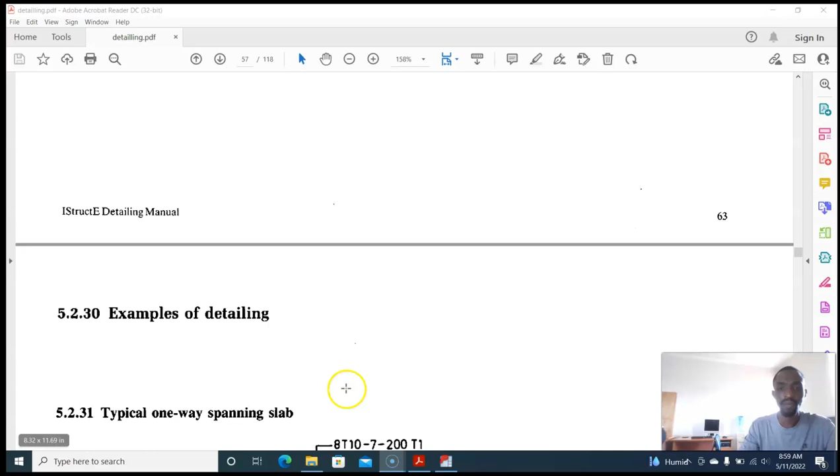So we had left off at this place. We had left off at this place. You click there. Yeah. Schedule. Yes. Schedule. Yes, we are going to check that. So we're going to check. Okay. So now we are at this place.

We had already done all bottom rebars. This is a bottom one going all the way. This is a bottom one going all the way. This is a bottom two going all the way. This is a bottom two going all the way.

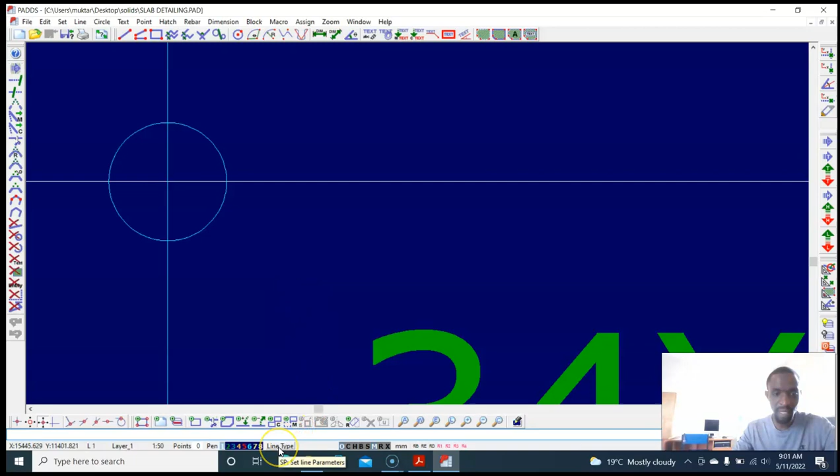Yes, this is the dimension line. This is the rebar. The rebar is supposed to be thicker; this line is supposed to be lighter. We have not activated the line thicknesses display, but you can do that here. View line width. So you see the blue is thicker. So when you print, this is going to come out thicker. This is going to come out thinner.

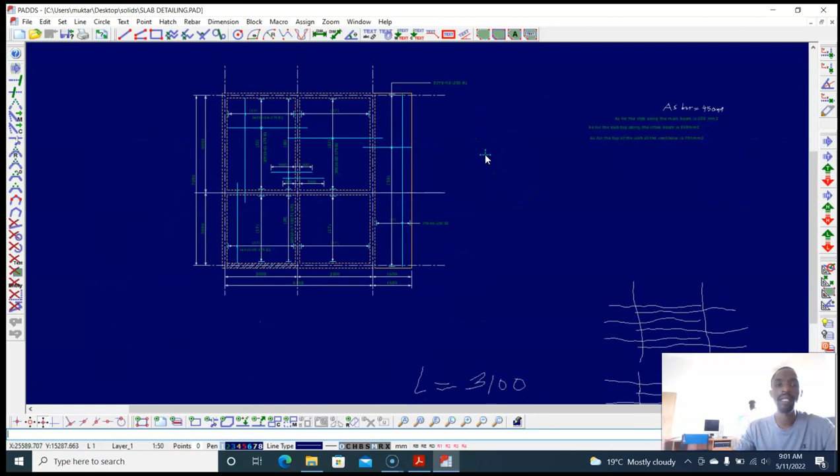Okay. So we can return. We've just done the bottoms, the bottom rebars. So now we want to do the tops. Even for the cantilever, we have done the bottom two. We have done this bottom one. Okay. So let's now start on the tops. So we want to put a top at this place. So this is a bottom rebar. It ends here. We need a top at this place.

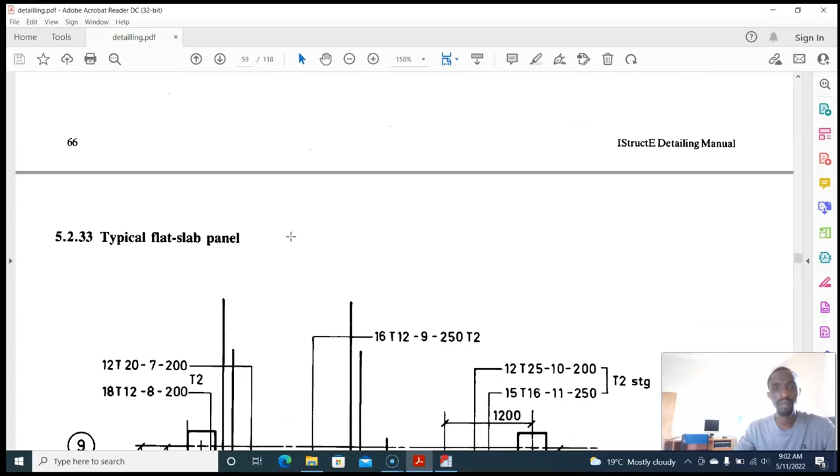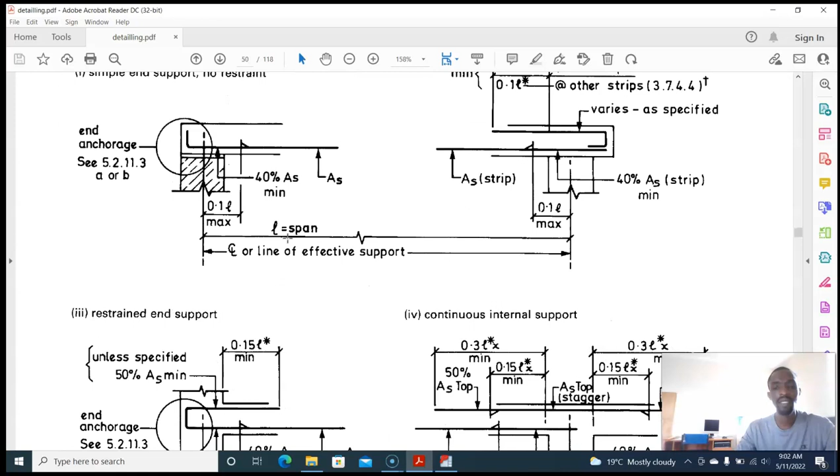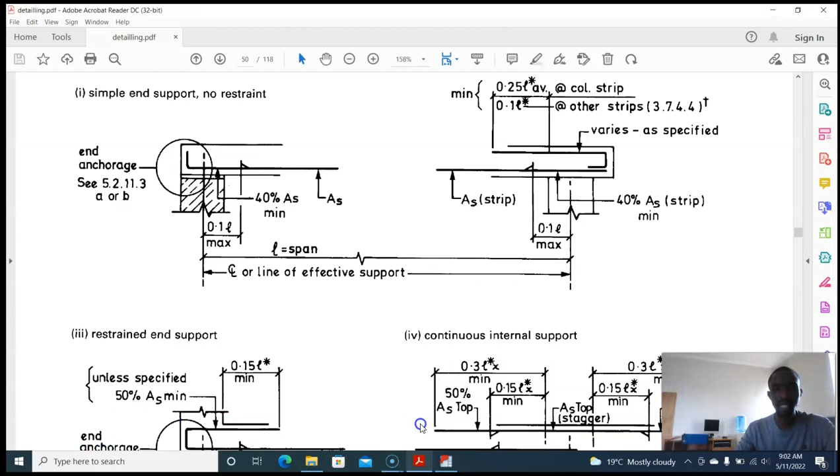So if we go back to this place and look at, which page was that? Okay. So let's see. That's the place. So at that end, what kind of an end is this? Because the beam is here, and the rebar will come into the beam. It's a restrained end. So that being a restrained end, we are talking about restrained end support.

So what we need to be keen about is that this rebar that's coming here is a U-bar, should be at least 40% minimum of this AS. Yeah, 40% of that AS. And should also be at least 50% of the top. The bottom you want 40, and the top you take 50%.

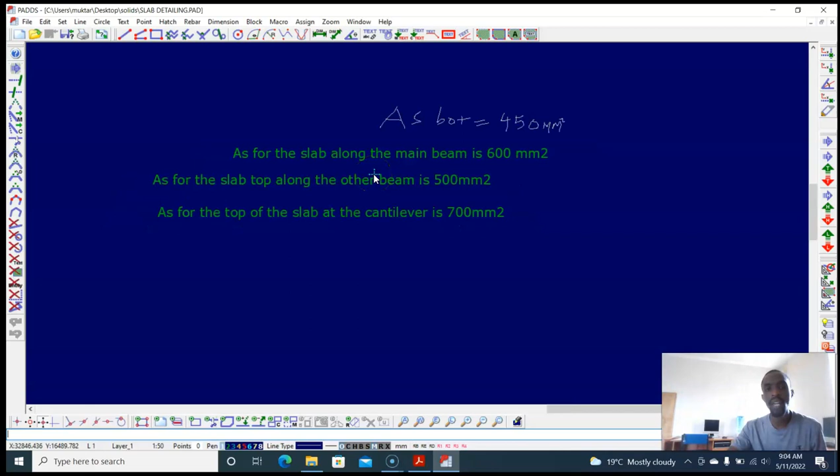So let's check what 50% is. This rebar is 24 by 10 at 175. So it's tens at 175. The requirement for that bottom we assume is going to be 450 millimeter square. So we're going to find 50% of 450. 450 times 0.5 is 225.

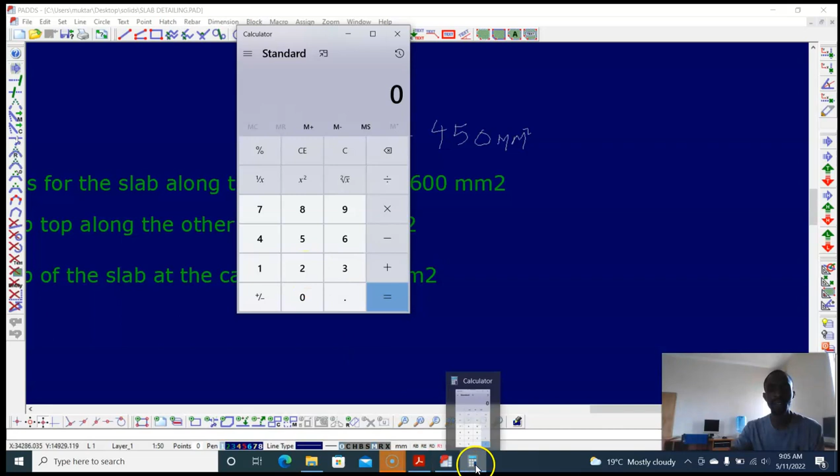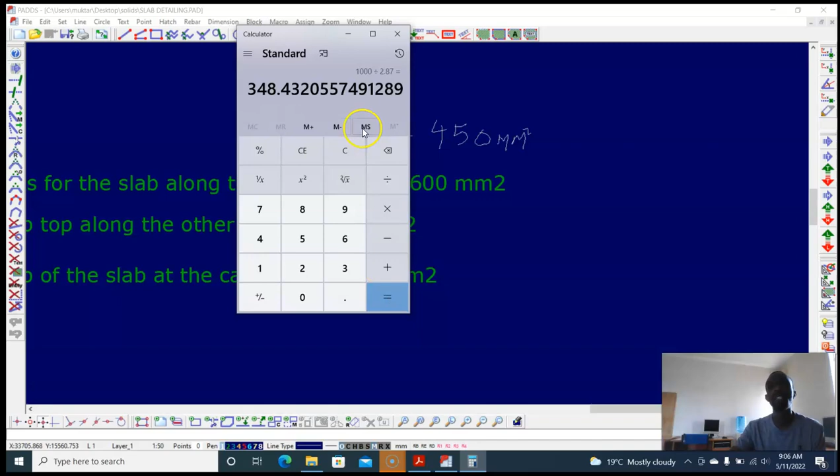So 225, and you're using 10. A 10 is 78.5, the area of one rebar. So 225 divided by one rebar, 78.5, gets you to 2.87 rebars. So 1,000 divided by 2.87 gets you to 348. So that spacing is quite a lot. Let's adopt 250. So we come in here and make that rebar.

This rebar should come 0.15 of L this way, the hook, but not less than 45 diameter. And this lower side, it must overlap. So let's check the overlap, and let's check the 0.15. The overlap is 50 diameter according to the code, not 45. 10 multiply by 50 is 500. So you need 500 minimum overlap this way, and then this rebar goes up and goes that way. This side you need 0.15.

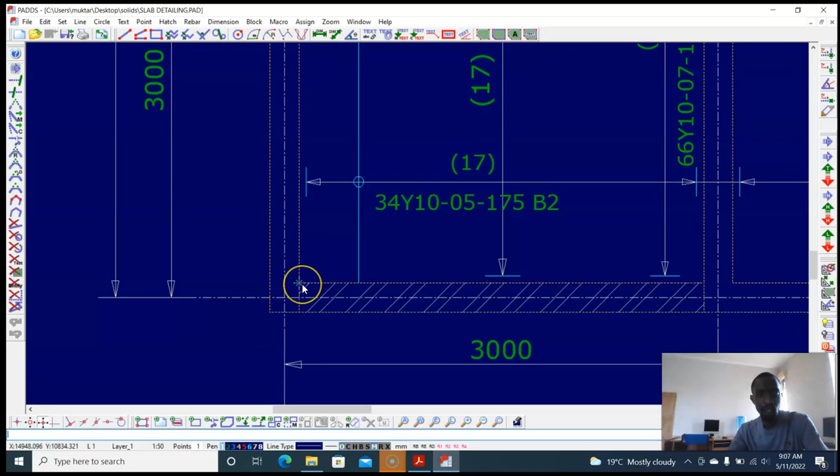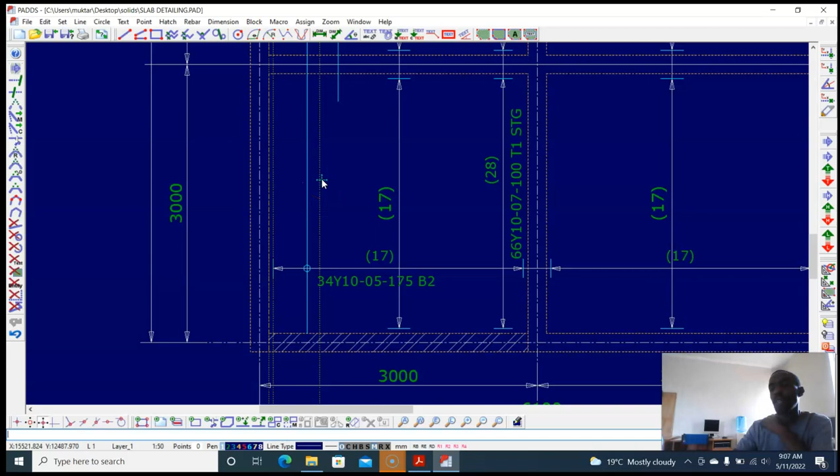Okay, let's do this where the U bar starts. Where these ends, you need at least LO, type LO here, 500. That's it. The rebar can start from here. It comes, it goes up, goes the other way. So how much distance do we need for the top? 0.15 of L. L is the span.

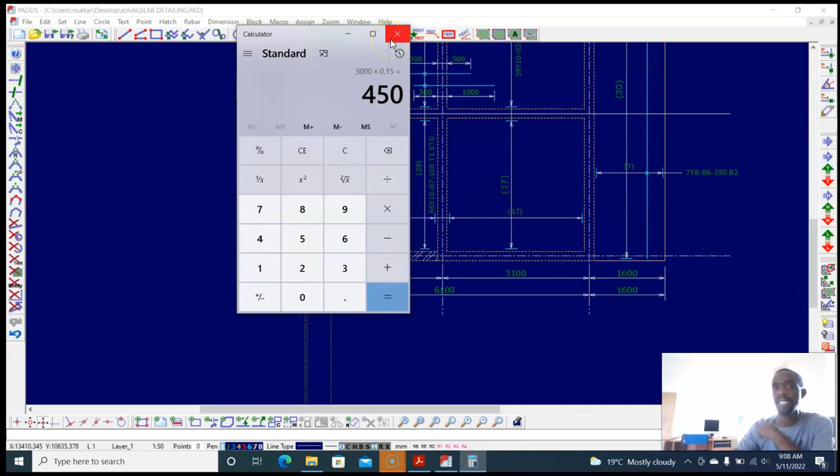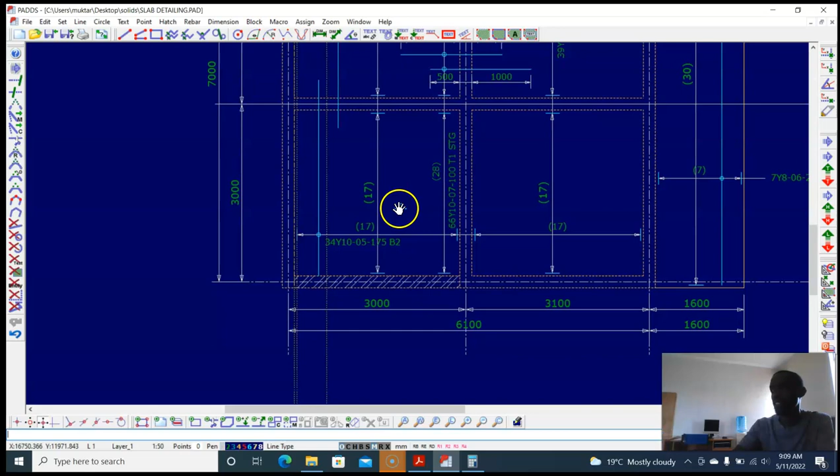So the span from here to here is 3,000. Let's check. 3,000 times 0.15 comes to 450. So from the edge of the support, it goes 450 inside. Basically that's the specification for the end. Let's maintain it at 500, both of them. So 450 is the minimum, and at the top we have put in 500. So let's do the rebar. LX, LO.

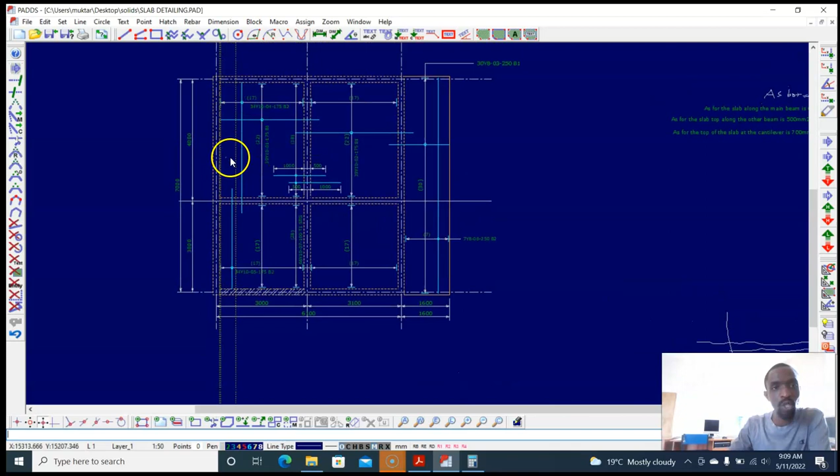Okay. What I'm doing, I want to specify the position. I check the best place to put the rebar where there is not much congestion. If I feel there's congestion and I want to put a rebar here, I can click this one, BA, I type BA, BB, select B4, I type B4. I can even take it somewhere there or wherever.

I can move it. I can reorganize this space so that when I'm putting something new, I have space for it. You see? Yes. BB to select, B4 to move something. So I'm going to Control Z. Control Z.

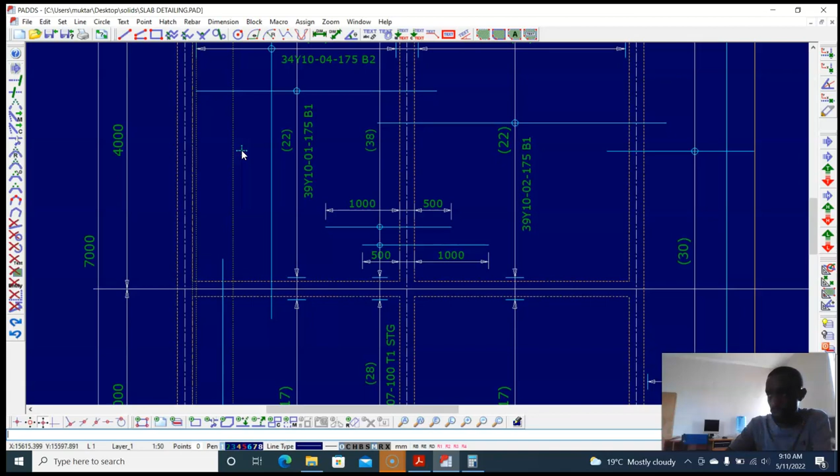So here we have two options. When we are putting this rebar, we can either reduce the rebar with cover or not. We have not worked with reducing with cover, so I want us to do that now. But we have another option that we can work with. So I want to draw the rebar this way. Using the extension, you reduce the size of the bar manually. You specify the size of the bar manually. Yeah, but I will do both. So let's do the one using the reducing with cover.

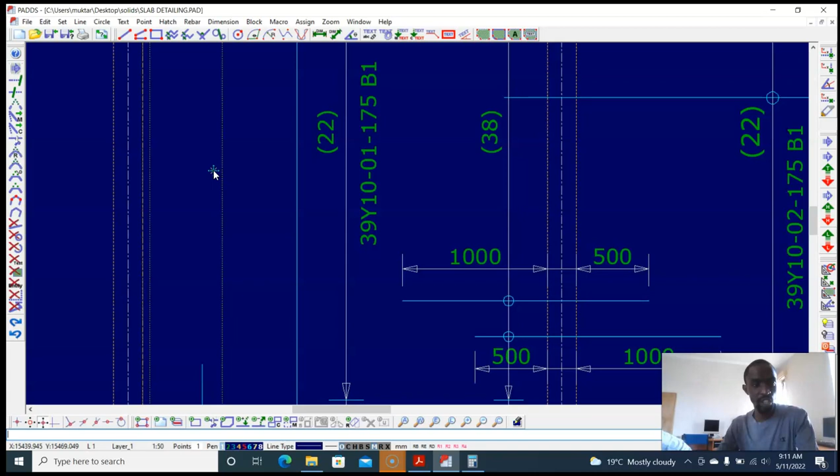I'm going to sketch like the rebar is going to come this way, that way, that way. It's going to come that way, that way, that way. So I'm going to specify 500 from here to here. The rebar goes inside, comes that way, comes that way. And the thickness of the slab aside, this one from here to here, D2 is 500. Now what's the thickness of the slab? 150, let's say. LO, offset that 150.

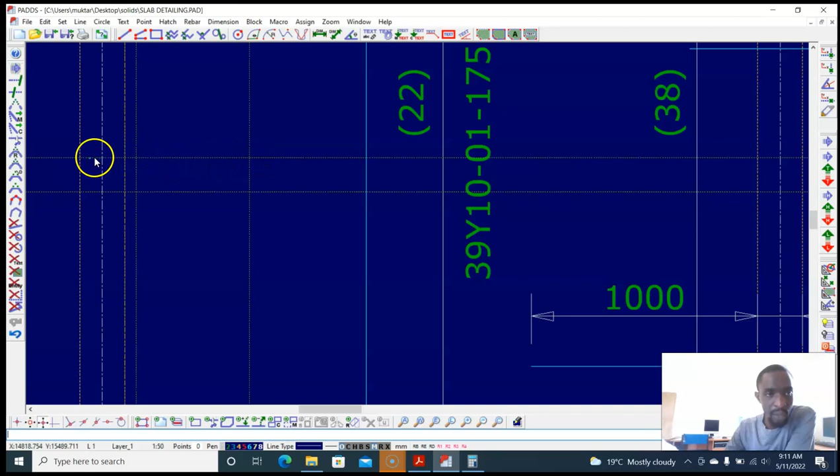So the rebar starts there, goes there, goes there, goes there. So let's draw the rebar, RB. If you look at this page, we are going to bar mark number 8; we are already from bar mark number 7. So bar mark number 8 is a 10, is Y type, and is shape code 38. But we want to reduce with cover. Top is 20, side is 20, and bottom is 20. There, you see? So that's the cover.

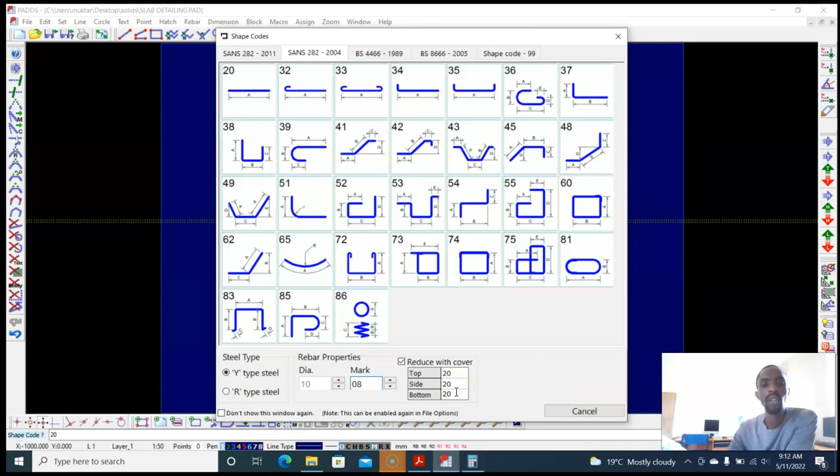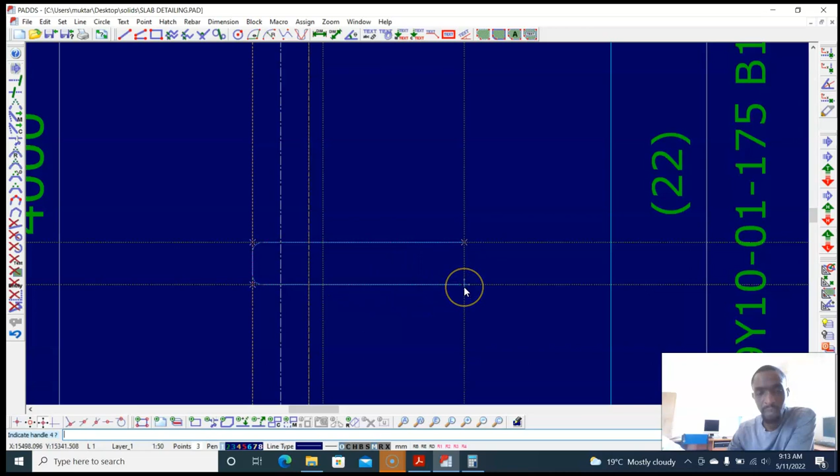So let's pick this one and place it there. I click there. That point is going to be there. The other point number 2 will be there. The other point, you see the one that's moving, that's a point I specify there. Then the last point I specify there. So it's placed and reduced with cover.

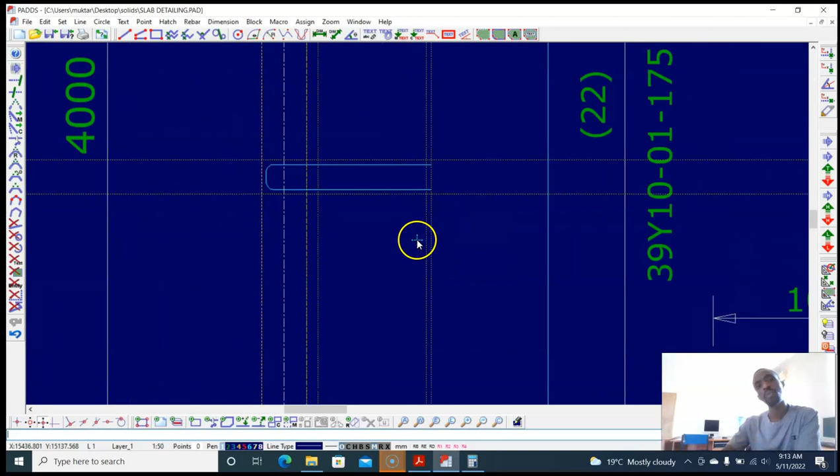Yes, but you see, there's something I needed to do before I did that. We don't want to reduce with cover this side. We just want top, bottom, and this side, but not here. So it's reduced everywhere. So here, when we are placing it, we have to either extend this or add a 20 so that when it returns, it gets to its position. So for now, I can do this. ES, I select all this and pull this across. Now I update the schedule. So I have the rebar there in place.

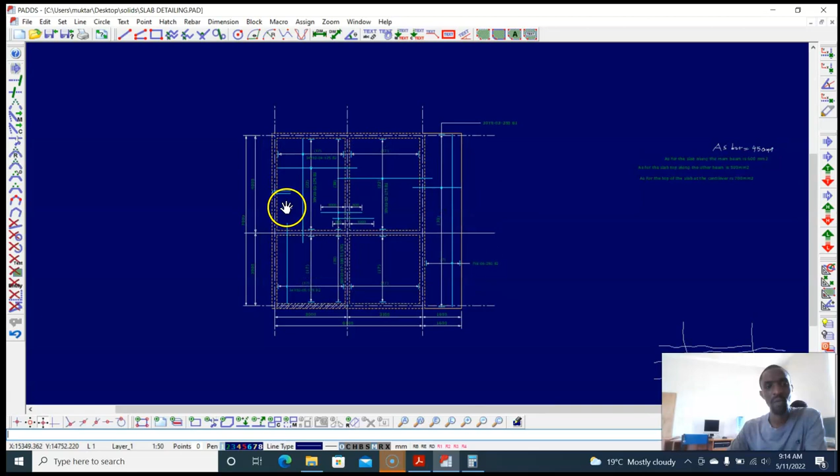So I have the rebar in place. You see? So the rebar is there and is in place. So I want to distribute the rebar. You have an option of displaying the rebar this way or displaying the rebar vertically. So you can rotate this rebar so that the display is vertical. What I'm trying to say is this, R, Y. You can rotate. Oh, okay. Let's do R, K. Rotate the rebar.

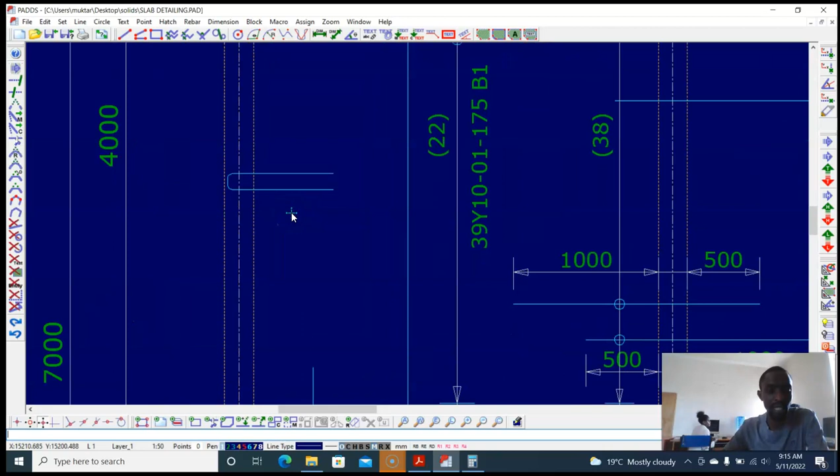You can view the rebar from the top, the way it actually is. You get it? You can view it from the top, or from the side; both are acceptable when you are detailing. You can even place it this way, view it like that, and then say it's a U-bar. Problem with this: if the length of the top and the length of the bottom are different, it would be difficult to tell somebody. The other is better.

Yes, so to rotate it, RK. RK to rotate this direction. RY, you can also rotate it the other way. You see? Or RK.

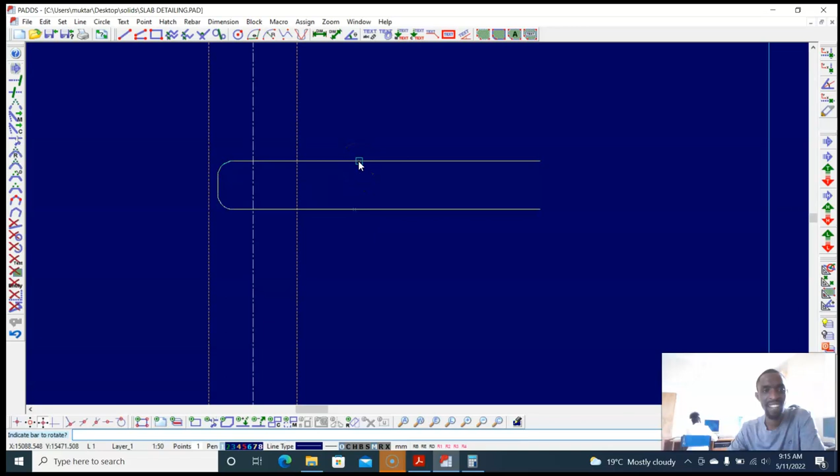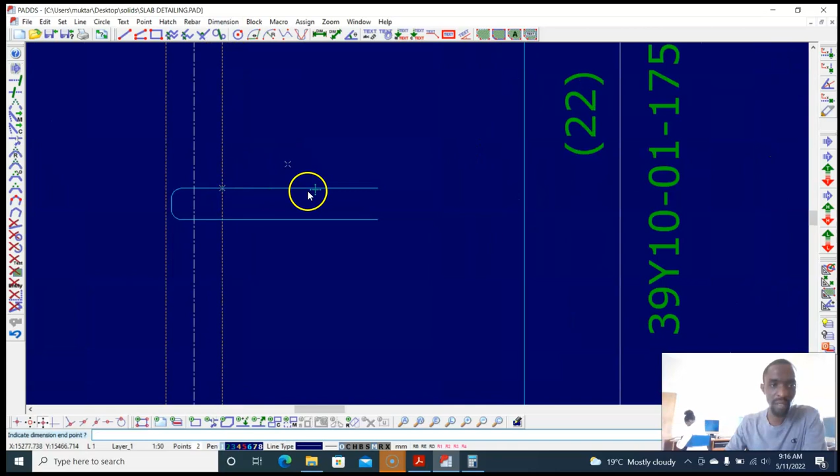Yes, can rotate it. So now we distribute this one. But before we distribute, it's good practice to even on here show the dimension. How much is this from here to there? It's 550. 500 and the 50 that we had left here.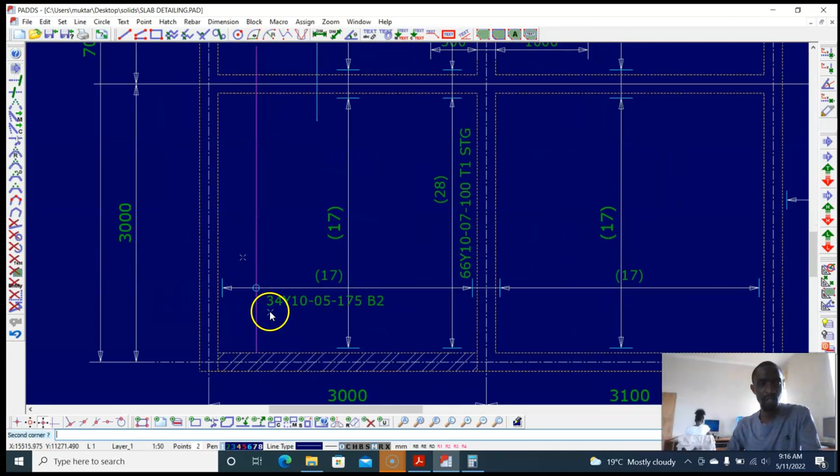Yes, DH, horizontal. Type DH, click there, click there. And then you click first where you want it. So I want to pass my dimension line here. But I notice my dimension line is going to pass here, and there's a rebar here. It's kind of congestion. So I'll pick this one and move it off so that it gives way. I can even place it there. You see? Then I click here, LY.

I pick the rebar, escape. I pick the rebar, R5. Then I start here. Zone ends there. Zone starts there. Zone ends there. And I can put my text. Yeah, it looks like a good place. Escape to put my text. Spacing 250. 250.

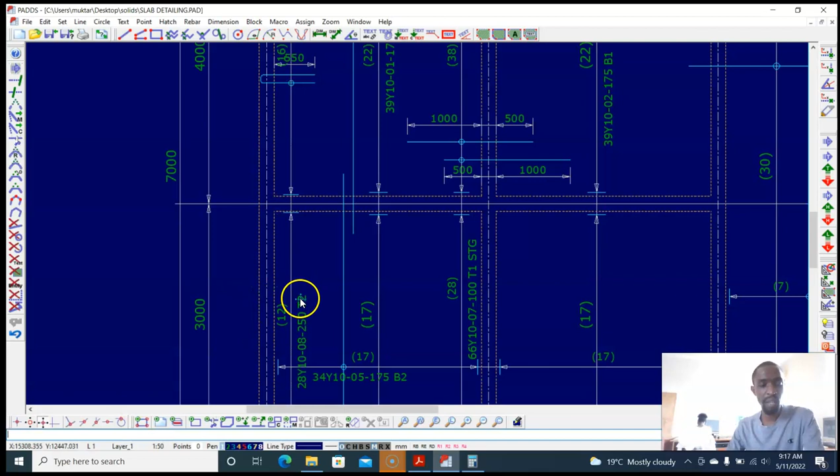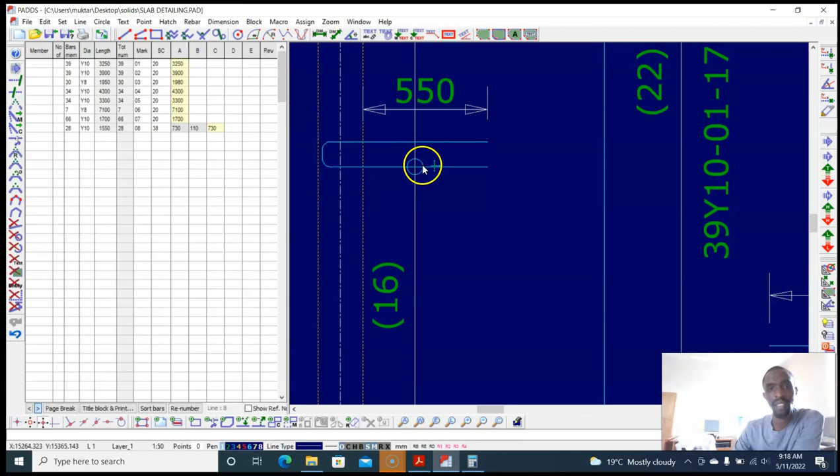Shape code 38, bar mark number 8. This is the length of one piece, the cutting. This is the dimension: 730, 110, 730. And the schedule is still building up. So far, we have 470 kg of steel. So that's where we are at the moment. 8s are 43 kg, all of them Y. 10s are 427 kg, all of them Y.

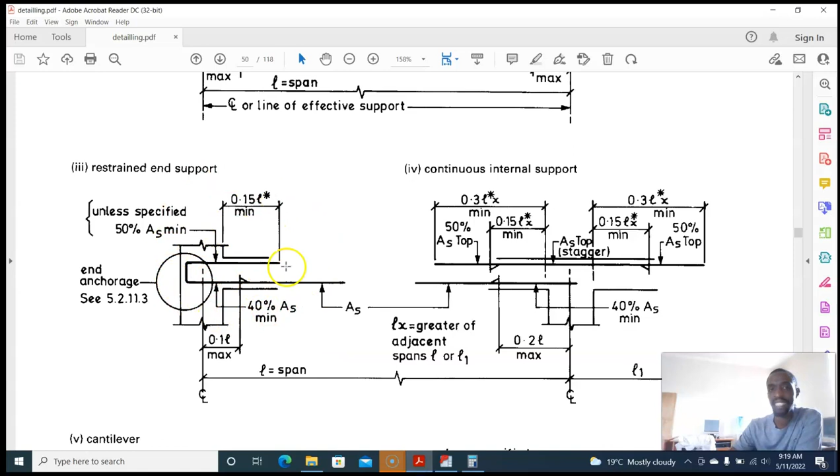So from there, let's hide the schedule. So we have this rebar. Up to that point, we would need a top for this place. So we have provided this top for the end. But we need to check: 45 diameter, 45 of 10 is 450. So this distance from here should be more than 450. But it's 550, so it's okay. So we want to do this top now.

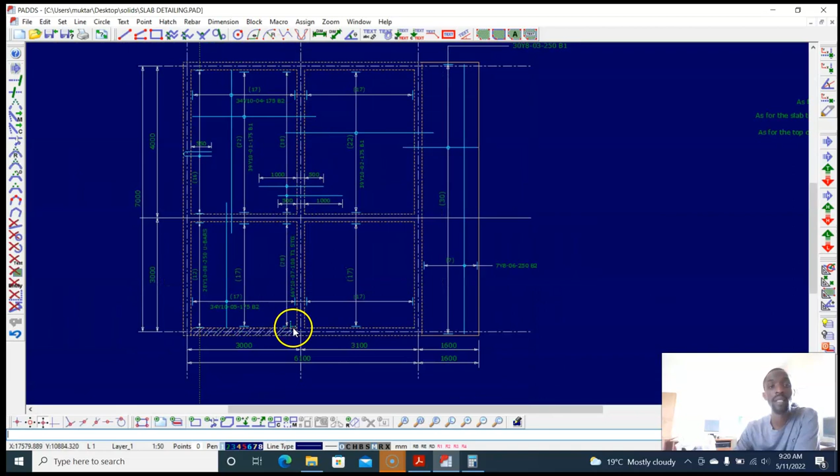Yes, so we did the top. We already did a top here, didn't we? We have a top one that's staggered there. So we were done with this top. So let's do the top for the cantilever. So let's check. We'll come to the tops here and the tops there as well. So let's go to the cantilever.

And again, you don't keep checking when you are detailing. When you start to detail, you might keep checking. But after detailing a few times, you memorize. It's just in the mind. These diagrams, these details are in the mind. These figures are in the mind.

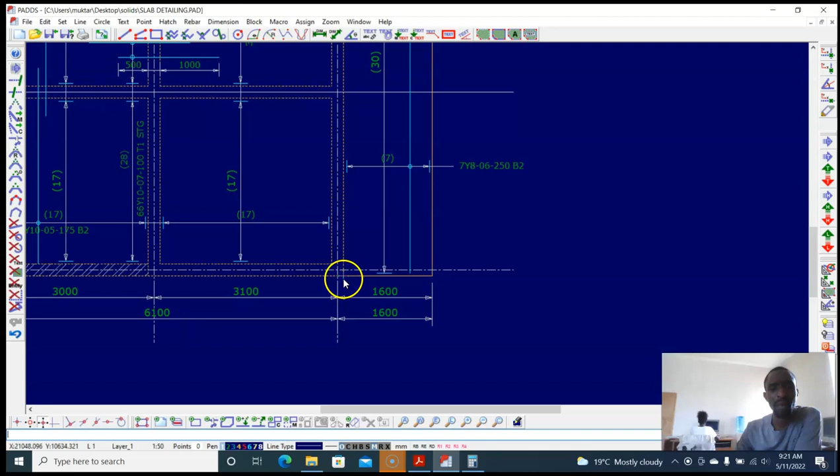So the cantilever, we said we need to know what is the K and what is the L. Our K starts from the center of the support up to the very end of the cantilever, the edge of the end of the cantilever. So our K in this case starts from here, center of the support, to the very end, which is 1600. Our K is 1600. So let's check 0.15 of K. 1600 multiply 0.15, 240.

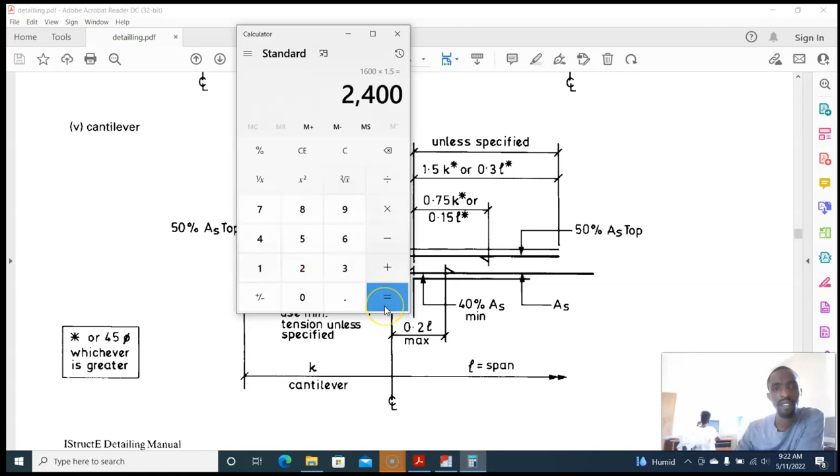No, not 0.15, 1.5. 1600 multiply 1.5, 2400. It's 2400. But what's 0.3 of L? L is 3100. 3100 times 0.3 is 930. So we would rather work with 1600 multiply 1.5, which is 2400. So the 2400 is measured from the center of the support coming back.

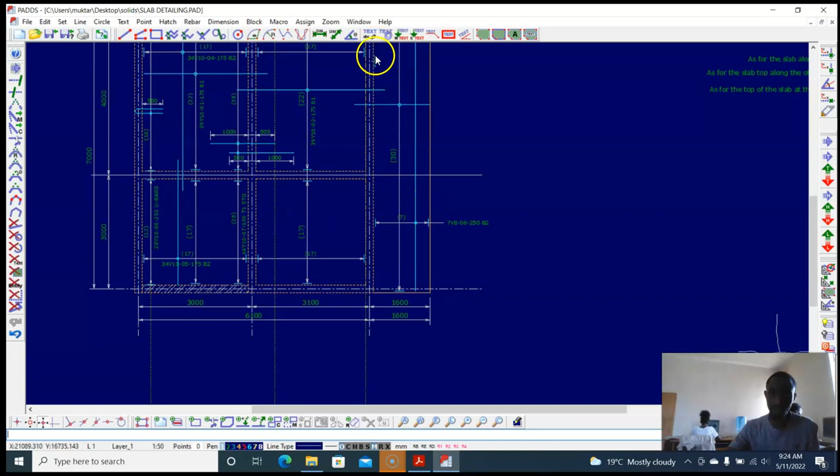So I click there, L1, L4, 2400. So your rebar that's supporting this cantilever must start here. Because you have a long cantilever, it has to start from here. Now, you can put from here all the way and distribute, but it might be a little expensive. This says you can do 50% of the reinforcement starting all that way. But the other 50 can start in the middle.

That can start in the middle of the distance between here and here, and end 0.5K between here and there. You get it? So we will do it practically. Just finish doing it, then you will see. So we need to provide.

We had said our top reinforcement at the cantilever is 700. So what is 50% of 700? 350. So what is 350 in terms of reinforcement and spacing? We are working with tens. 350 divide 78.5. What's that? 4 rebars. 4.45.

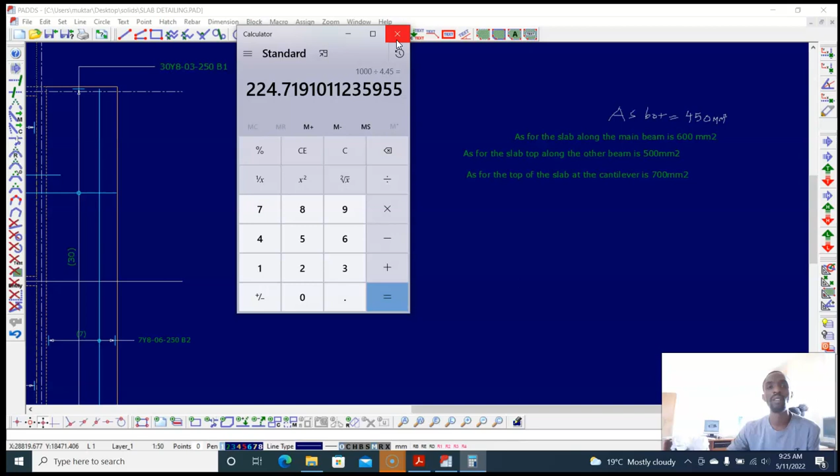4.45. Let's say 1,000 divided by 4.45 gets us to 224. Say it's spacing of 200. So spacing of 200. So let's confirm it again. 350 divided by

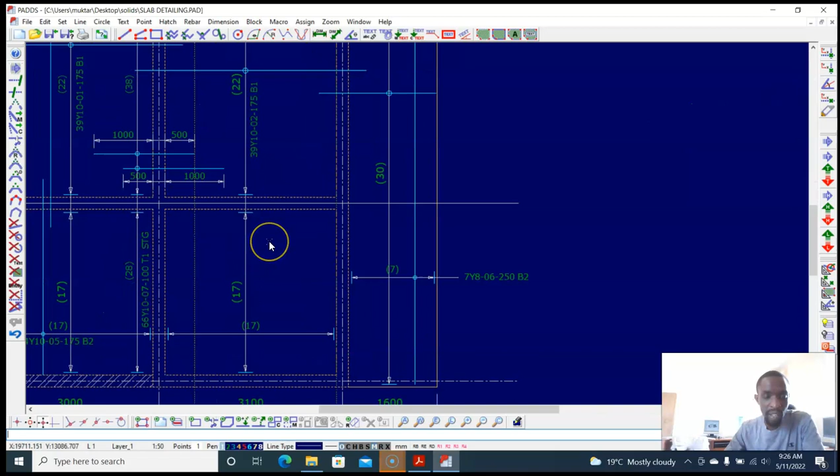78.5. That's okay. So spacing of 200 from here, LX, spacing to the far end, or we can either do from here to the far end, then we put another one in the middle. You get it? Saying there's two types

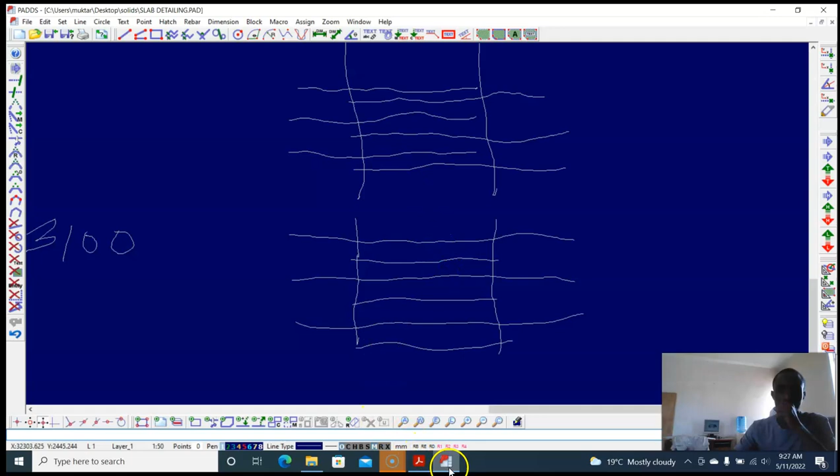Yes, 2 times. We want to put from here to here, but we also want to put 50% here. Same thing here, we put from here to here and another one here. So this is 50%, this is 100%. You see? Or we can stagger, or we can alternate. So we come here, let's alternate. Here we are staggered, let's alternate here. Alternate and stagger achieve same results.

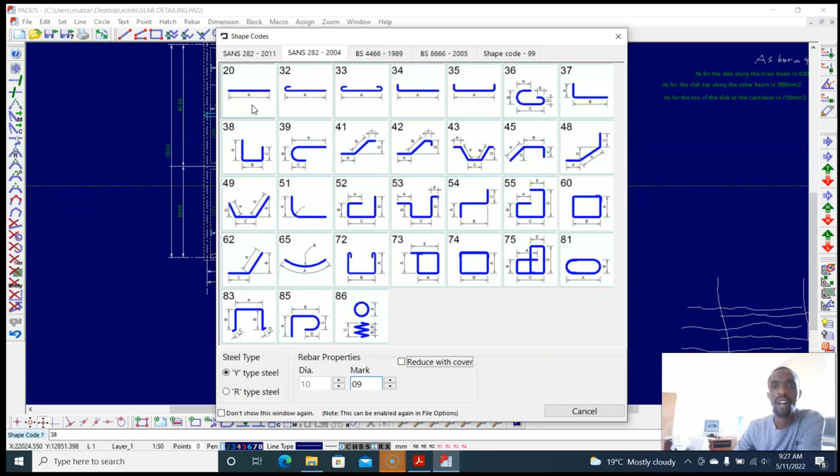So let's do one from here to the end. A space is 200 RB, and that was a 10. Yeah, there is a 10 as bar mark number 9. We are not reducing with cover now. Rebar 20. Or we can reduce with cover. So I can LO here and say this is 20.

So we start the rebar here, then it will be reduced at this point. RB, pick that. Sorry. RB, reduce with cover. This is the spacing. I pick this rebar. I start here and take it all the way. It's been reduced with cover, you see, and this has been reduced to that point. So that's where you went from.

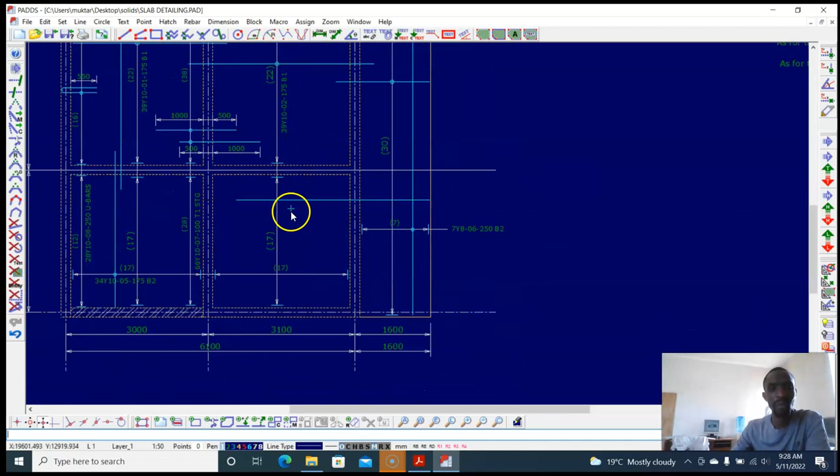Yes, so let's distribute this rebar. To distribute that rebar, I'm going to click. I'll distribute this one first. LY. I type there LY, pick the rebar, R5, starts here, ends there, starts there, ends there, escape. Place the rebar here. We said spacing of 200, and that is at top one. There we are. We have placed that one.

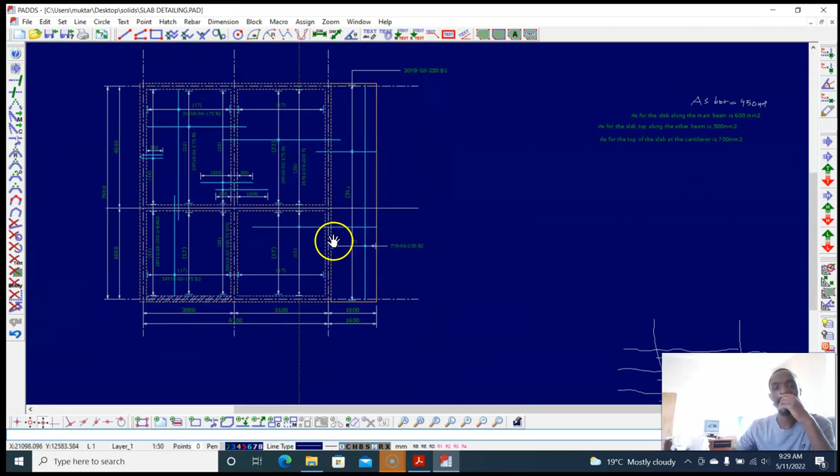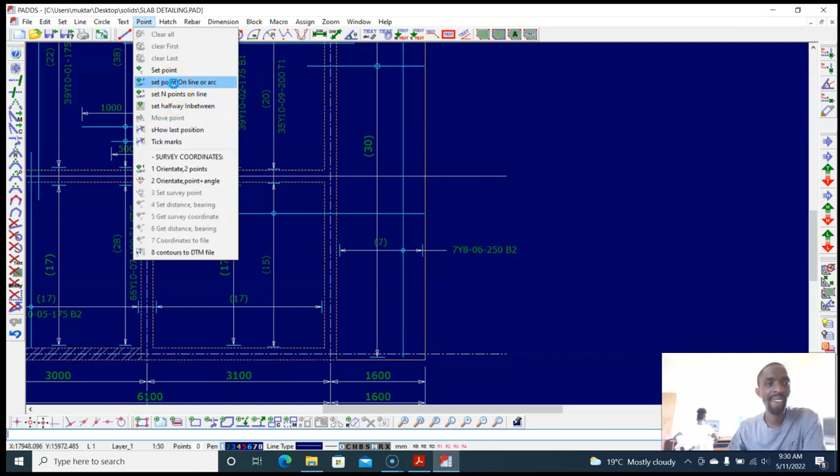But we need another rebar to start. Okay. So we want another rebar to start in the middle of this. The middle of this, you see. 0.15 L. You see, in the middle. We start there. So how do we point inside? If I type there, it's going to stop. Insert. This one. Click there, LY.

I want a rebar to start here, and where is it ending? It's going to end 0.5 of K. K is 1600. So it's going to end 800 in front. After the here, 0.15 L, this is 0.3 L. Yeah. So this is going 800 there. So we need a rebar.

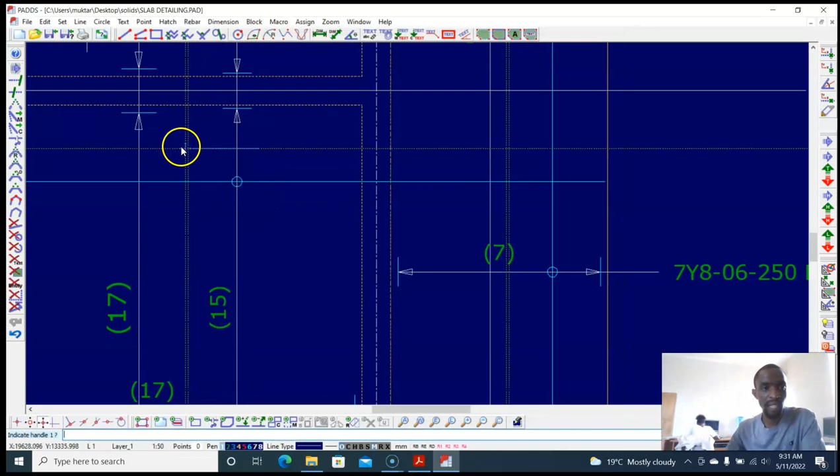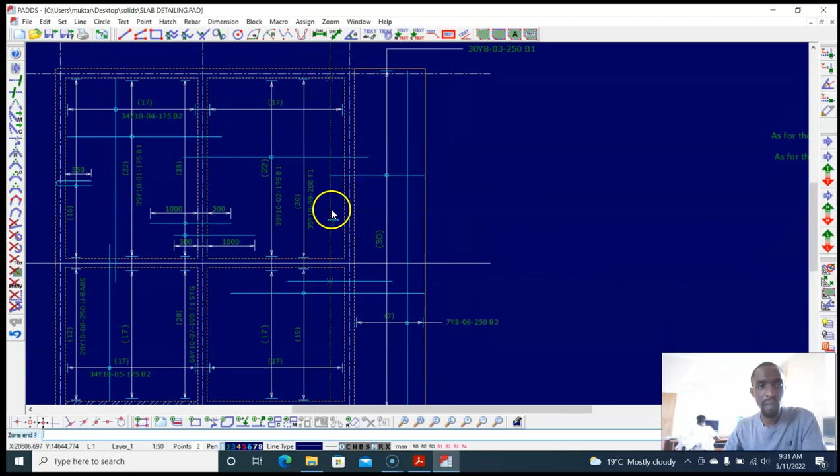Let's move with cover 20 because we are going to offset with cover 20 with the rebar starting here, ending there. It's been offset with cover, and distribution of this rebar again, you see. So we put this here, LY. I pick this rebar, RY. I distribute from there to there. I put my text there. Say yes. So bar mark 10 and bar mark 9 have also been registered in the bar bending schedule.

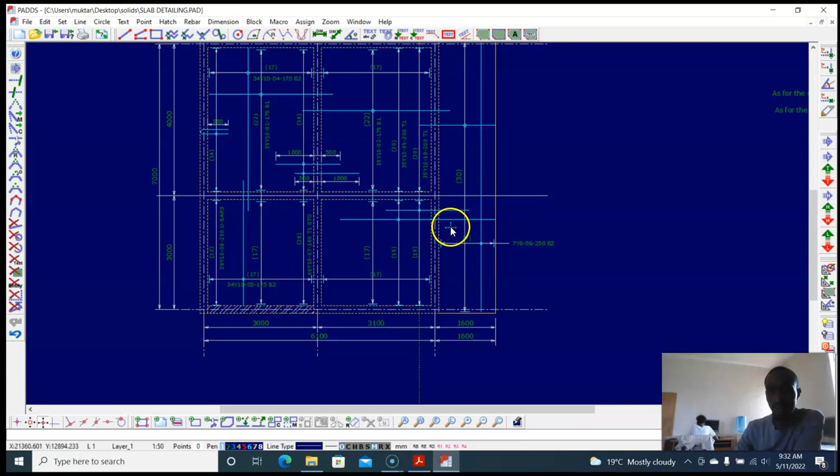So this one is spacing of 200. The other one is spacing of 200. There's a place they are going to be spaced at 100. If the 100 spacing is too close, you can bundle them so that it's 200, but there's a place there are 2. So when you are placing the poker, it's easy to vibrate. So that's the better way, because now it's becoming too close.

So now spacing will be 100, isn't it? Yes, in between. 100 is now too close. It's okay, but if you think it's too close, where there's going to be 100 we can put together two, tie them together. Oh, yeah. So there will be spacing of 200 for you to place a poker. And that's the better way we will do it.

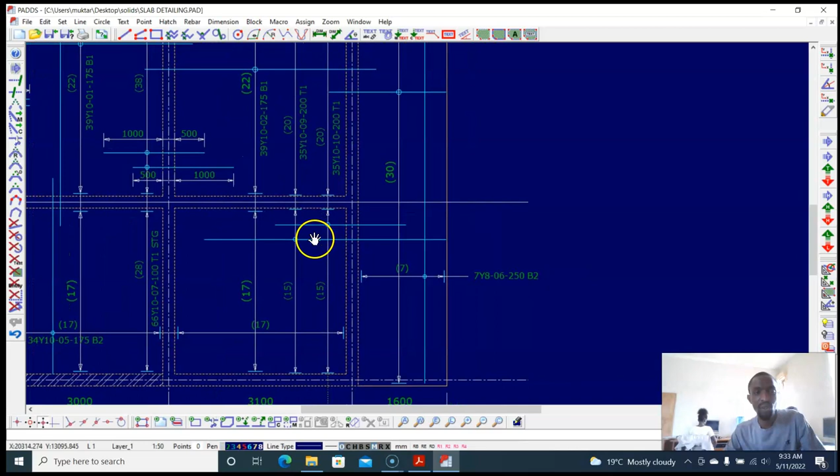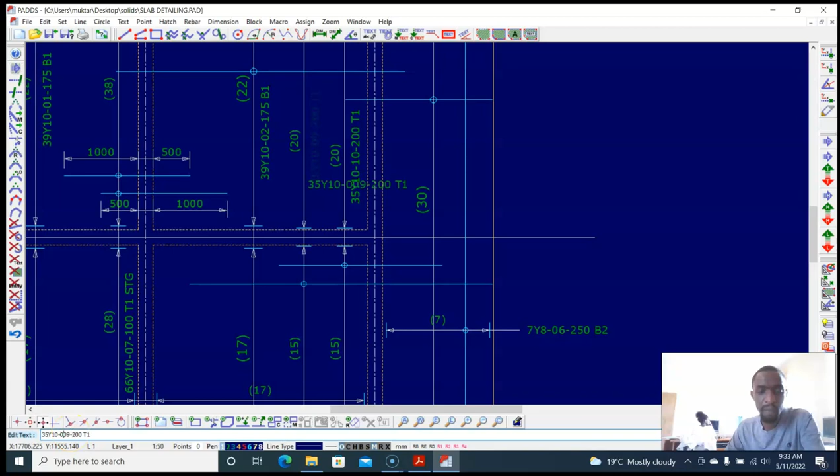So instead of having 2 dimensions together, we can have text edit. I say 09 shift plus 10. Are you seeing that? Top 1 alternating. So this marker for 09 and 010, edit info. This is 09 and 10 alternating, and this marker for 10 I'll pick, place here.

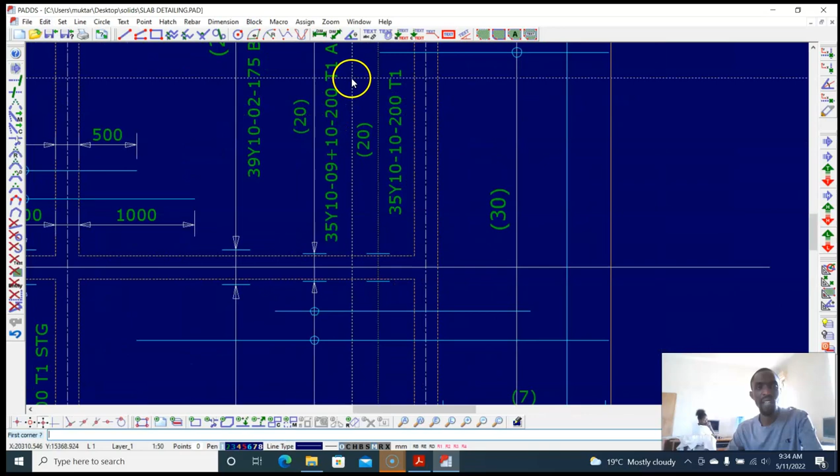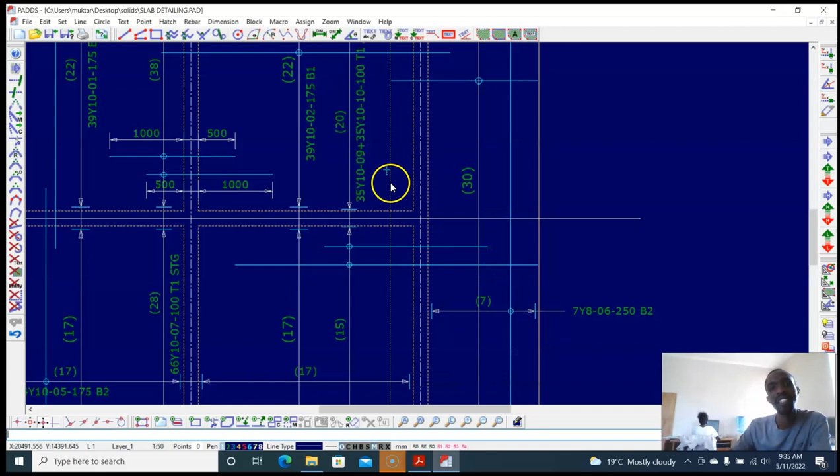Then I remove this, so this dimension is no longer necessary. So I've decongested my drawing. Yes, I'm combining them. 35 Y10. Now our text is not very correct. We are going to have 35 Y10 09 plus the others were also 35 Y10 number 10 at 200. Now the spacing is going to be 100, 100 alternating. That is the correct naming.

You can also, because now why you specify here Y10 and Y10, you can combine Y10 and Y12. You can combine both. You can also do it like this, so that the text is like that. You just have to arrange your drawings properly.

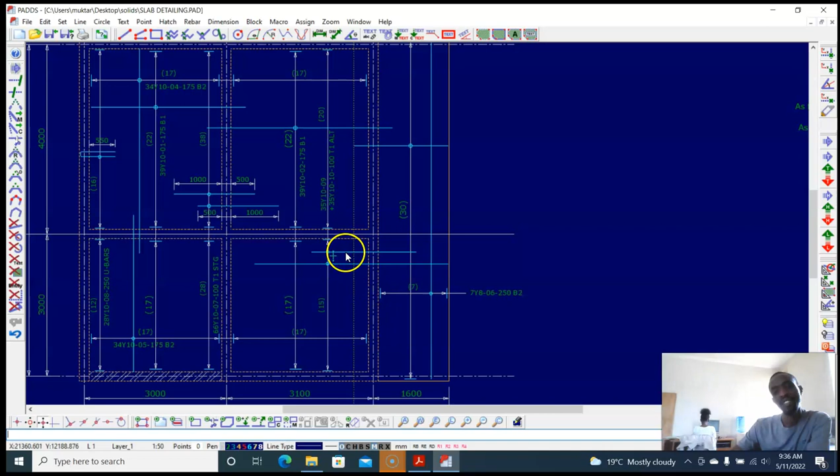That way, it's much better. You see, so these are alternating. Alternatively, you can bundle them. Edit info. You can say 35Y10 plus 35Y10, number 10, 200, but bundled. Spacing is 200, bundled. So, yeah, two, 2, 2, 2. Yes, that's what the code is specifying. Those are the options you have depending on your situation.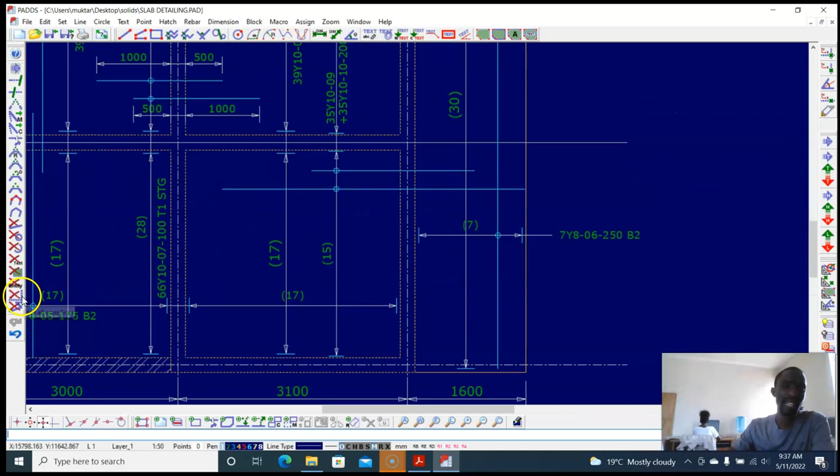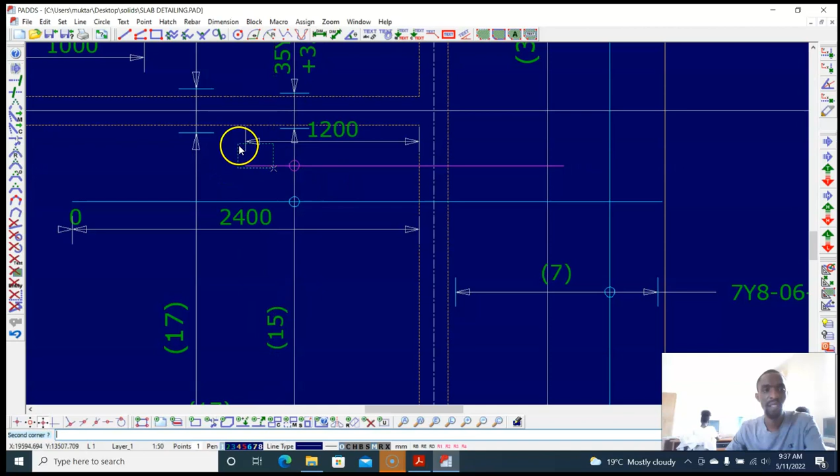So we have put the top here, but it is good practice to show this dimension. Dimension horizontal. How far? Dimension horizontal. Horizontal. Yeah, it's showing it here, because I was clicking again the other side. Let me click this. You see? And then the other side I need to show dimension horizontal. Click, type EE. That way.

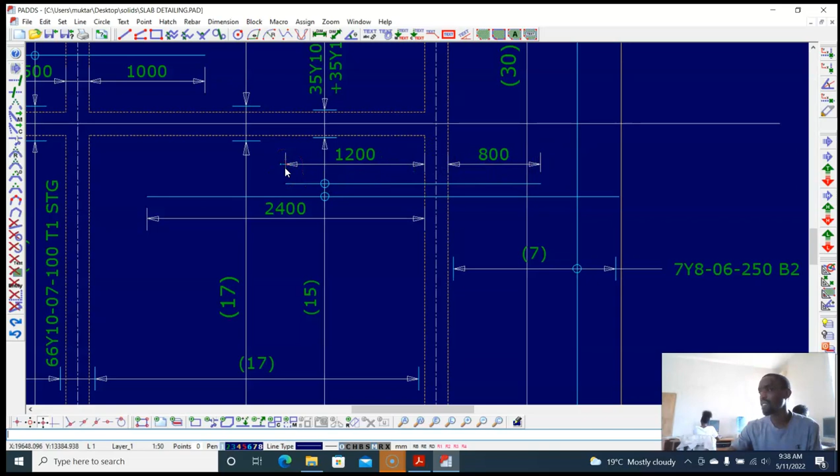So you see, that way, if somebody looks at this rebar, he knows from here to here it's 2400. From here it reaches the end, just leave the cover. This one starts 800 here, goes here 1200. So it's properly dimensioned. They are 35, these ones, and the others are 35, 200 bundled. So we have the top reinforcement here, and the top reinforcement on the other side.

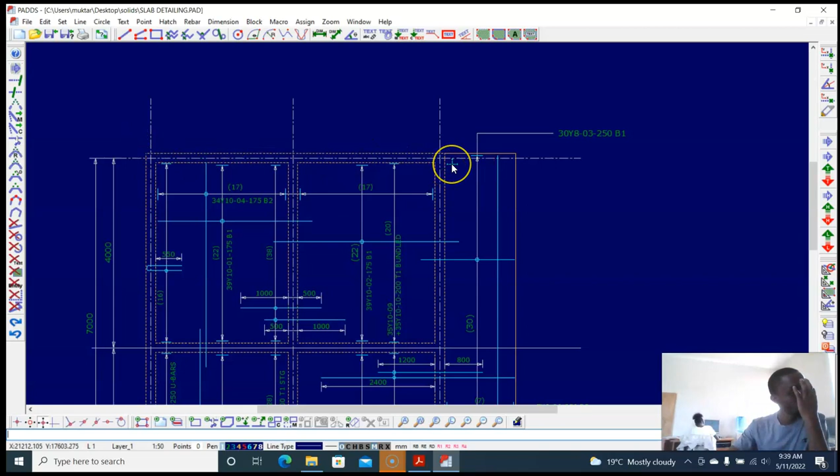Now we want to have a top for this side. That's top two, for the other side, or U bars on the other side. Oh, because you pass all that. I don't think you pass all, it's two only. No, we put U bar the same way this side, the same way I've done this side. We put here as well, because it's a restrained end. So it's easier.

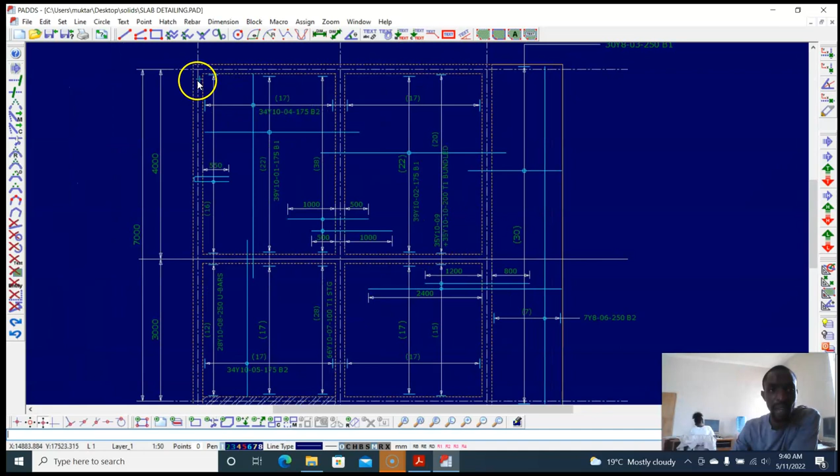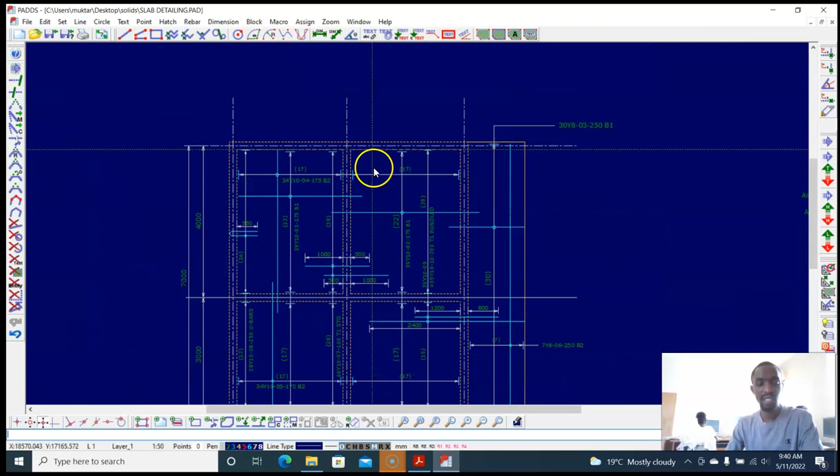So what kind of rebar are we going to put here? What's the span? 4 meter, isn't it? Span is 4 meter. 0.15 of 4, you remember? 0.15 times 4, 600. So click there. This rebar ought to come 600 inside. 600 there. But now I can move this one a little, try and decongest that area because I'm putting a new bar there.

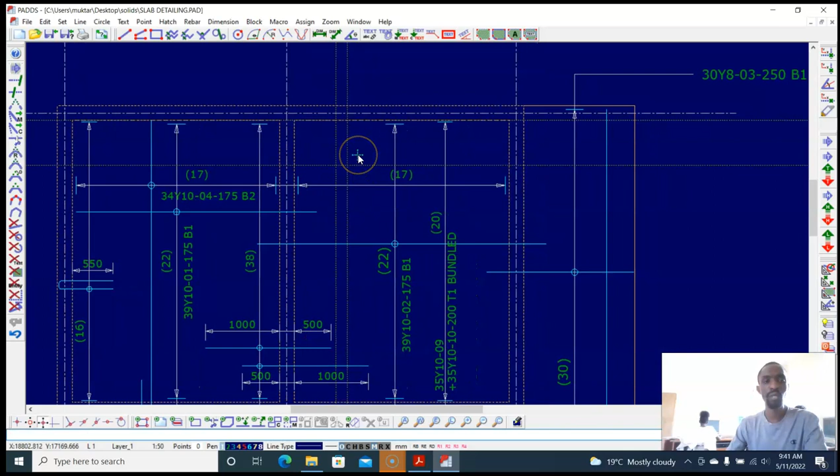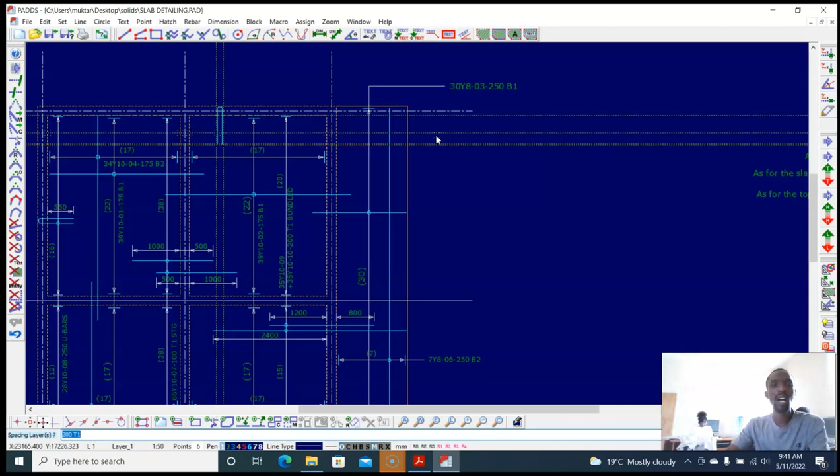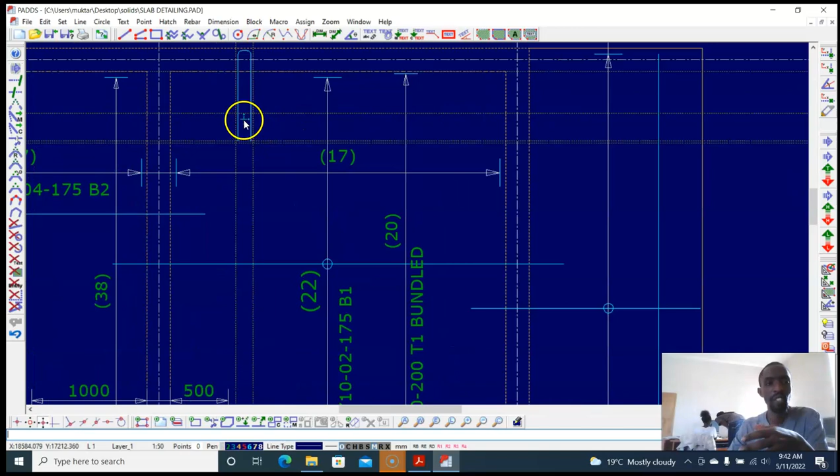And what was also a requirement here? Let's assume it was the same requirement as here. That is 250, 10 and 250. So let me distribute all the way. R5, click there, click, click, up to the end. Escape. Let's put the text there, 250. There we are.

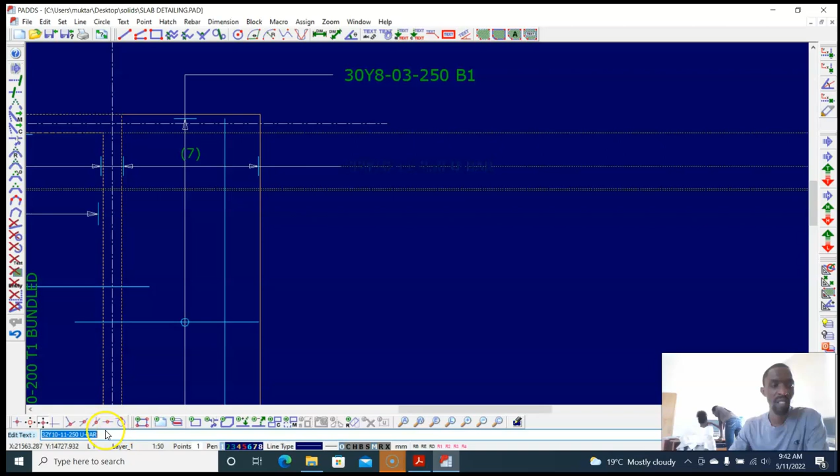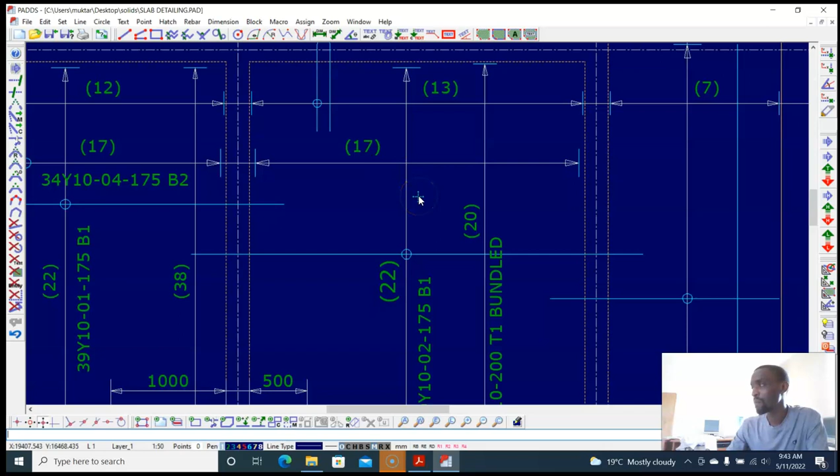Then this one I'm editing. Is U bar or U bars, whichever, it's still okay. Edit info. You change from here, or you text edit, TE. Click and change from here. Text move. I'm trying to just make my drawing neat. TM. Move that. We can do BB, but for text, you can move with TM. Okay. So we have our U-bar in that place.

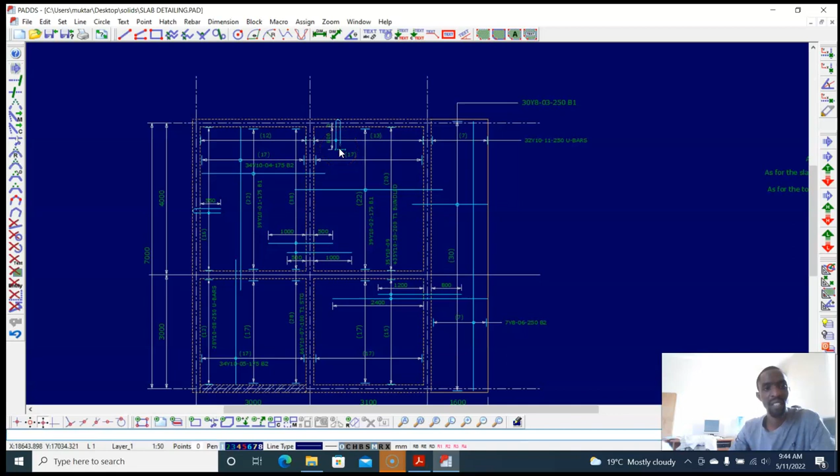Now, let's dimension here, DV. You see, 600. So the size here will be 550. If I was doing my detailing myself, I would put this rebar 600 this way and the other way. 550 and 600, the difference is so small, so they can cut all of them together and place. It's easier. The span is this, it's going to be about 500, so I can just pick this bar and place here also. So I copy this.